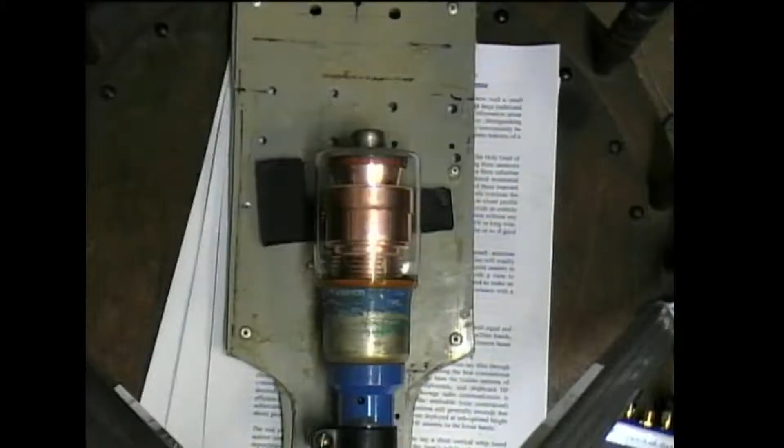So without further ado, if we do this transition, what you're looking at here is the vacuum variable capacitor that I showed in our last DATV night. Now that particular capacitor is a 5 to 200 puff range.

I purchased it at the Meet the Voice pre-loved car boot sale, thanks to Bryan VK7KWB, who had it already mounted on a board and driven, complete with a little geared drive and some micro switches as limit switches. So he's done an awful lot of work, and you can see the board that he mounted his particular loop on. So this is what I've been waiting for.

The impetus for this, that's probably a good place to start. The impetus for this was very much looking for a directional antenna with some gain for 30 meters, so for 10 megahertz. For those who don't know, I run 2 WSPR stations in the shack 24/7, one of which is on 30 meters, and the Smith chart exercise that we went through a couple of DATV nights ago was to tune up a piece of end-fed wire that I had up in the air for 30 meters, to improve the reception and transmission characteristics of that antenna. Now that's great, but it's a fixed piece of wire in a fixed direction.

So anyway, without further ado, what I will do here is I just want to show you, and I'll leave the link to this in the notes for this particular video. This is Miguel's VK3 CPU's mag loop antenna calculator, and this is web-based. It's all Java, a really nice little application of Java.

And what it gives you is a whole lot of variables down here, which include things like the diameter of the loop material, the diameter of the actual loop, the number of turns of the loop. So if it's a single loop or it's multiples of that loop, there's a transmitter power, and then the actual effective resistance of the loop.

And it gives you these sliders down the bottom, and there's a couple of other things down here you can set up: is it metric or is it imperial? What's the material it's made of? Is it copper or is it aluminium? Is it circular in shape? Is it octagonal? Is it hexagonal? Is it square? And that's fascinating to play with, and we'll do that in a little while.

And then along the side axes are all of the characteristics that get measured by all these different coloured lines in the middle here. There's the capacitance, there's the voltage that's generated, which can be a bit scary, the bandwidth in kilohertz, the efficiency in percentage, and then over here we've got the various resistances and reactances, the Q of it, how many amps are flowing through it for the power that you put in, and then also the wavelength of the loop, which is of course well under 1 in most cases.

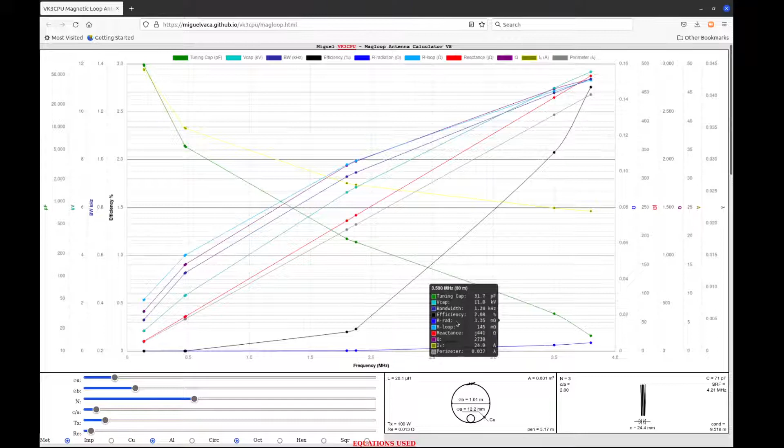Voltage across the capacitors, 6.8 kilovolts. And there's your tuning capacitor - that's one thing I didn't point out - it also tells you what your tuning capacitance should be, and we're at about 318 picofarads, so it's a reasonably large capacitor. I wouldn't be able to do it with the one I had here. So it lets you, before you even cut some heliax or cut anything, model what you're looking at.

At this stage, I'm looking at about a 2 meter diameter, or 1.9 meter diameter, using the 1/2 inch heliax. It gives me a range - about 70 odd percent efficiency at 30 meters at 10 megs. It also gives me 14 megs, so 20 meters. It does give me 40 meters, although the efficiency is fairly low down there, and it's only about 5 kilohertz. That's probably where it stops.

It does give me the other bands here, obviously 80 meters and a few others, but at 80 meters the tuning capacitance it's telling me needs to be about 250 picofarads, and I only go to 200. So yeah, it will probably cover 40, 30, and 20, but it's really the 30 meter band I'm actually interested in.

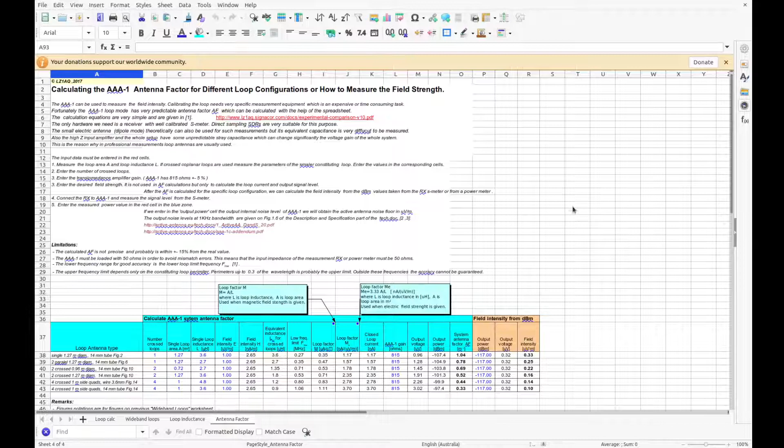Now this wonderful spreadsheet, a series of workbooks, enables you to do very similar to what Miguel VK3CPU can do with his simulator, in a whole bunch of spreadsheets. So you can put in a range, and it gives you all of the factors which are then plotted.

On the Java application, this gives it to you in a whole series - the loop calculation. So for receiving magnetic loop, you can put in a couple of your factors here, and it works out the rest of it for you.

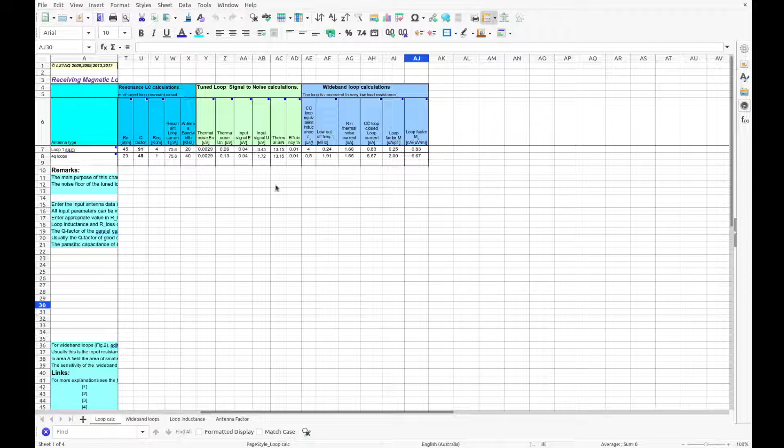This is for receiving loops, for wideband loops, and this gives you a whole bucket load of different configurations that this model calculates, and you can take into account. So you can play with different shapes, and it gives you the characteristics. And also, it's interesting.

This is LZ1AQ, who's come up with this, and I'll also post the link to this in the video description. He came up with this back in 2008, actually, by the look of that.

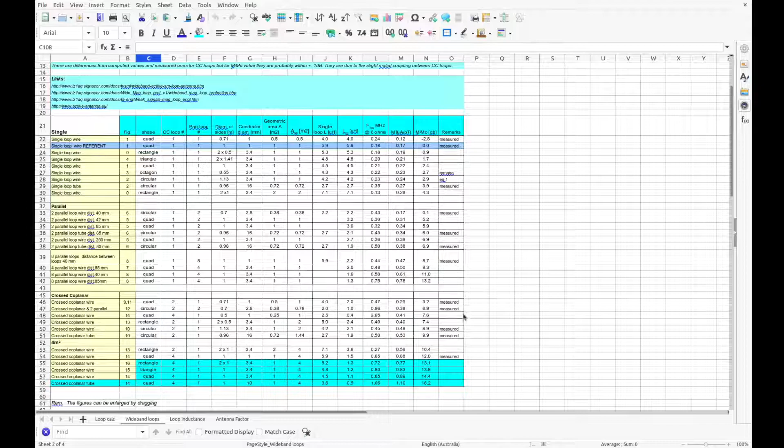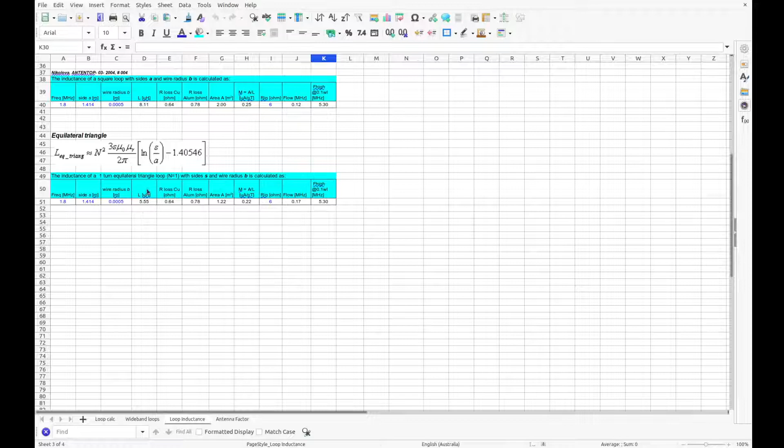In this particular paper, he's actually measured empirically some of these different loop configurations. So there has been some real world testing of differences in loop configurations as well, covering loop inductance, which is the formula behind the spreadsheet calculations, and antenna factor for different loop configurations, or how to measure the field strength.

I'll also post Steve Adler's, VK5SFA's, website. In his development of the 160 meter loops, which is an award-winning loop, I think he got an ARRL award for that in one of their homebrew sections. Congratulations to Steve. I'll post his website address, because they did a lot of testing, I think it was Adelaide Hills, or maybe AREG, or maybe both, with quite an amount of field strength testing on the actual loop configurations, and I think there were some adjustments made to improve the field strength.

They were hoisting field strength meters up into trees and all sorts of stuff. That particular design has actually been measured and proved to be quite successful. I know when I've contacted Steve on 160 meters during the RD contest and a few other contests, he is a thumping signal into VK7. So the loop works really well, and he was certainly hearing stations that I had absolutely no chance of hearing.

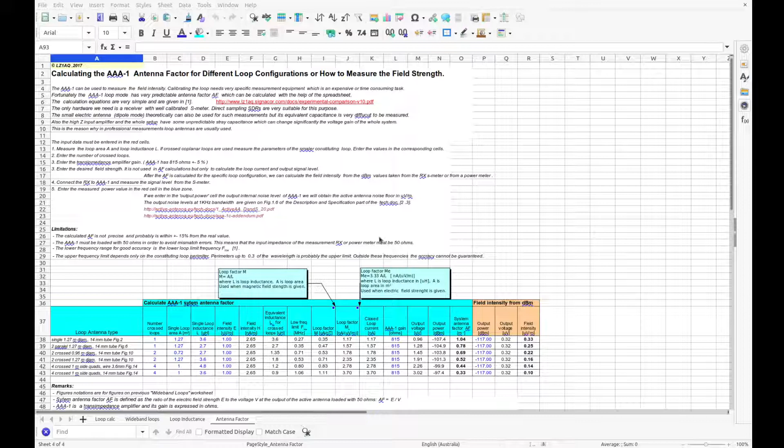So I'll post that. That's another calculator, if you like.

Now, let us know when you're running. Oh, yes, okay.

Oh, very good. Okay, and Jennifer Folds has just posted that the ACMA awarded my foundation license today, so fantastic. Jennifer, if you can let us know what your call sign is, that would be absolutely fantastic.

Warren just makes a comment there: haven't got my ham shack set up yet, so good stuff. We wait with bated breath, Warren. And for those who haven't got a VK0 contact, I'm sure you'll post when you're going to be transmitting, and you'll have an absolute pile up.

So what I was going to do now, this is a bit of an experiment. Let me just reposition. VK6JEN for Jennifer. So fantastic. Good stuff, Jen. I love the call sign, very easy to remember. Good stuff. Now, we'll just head over to our close-up camera.

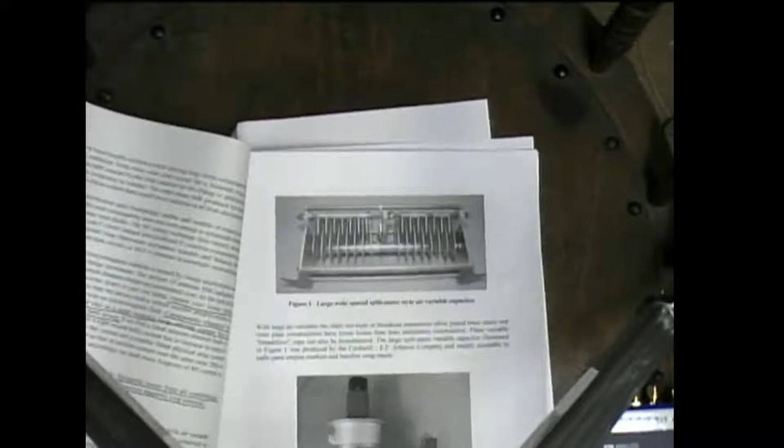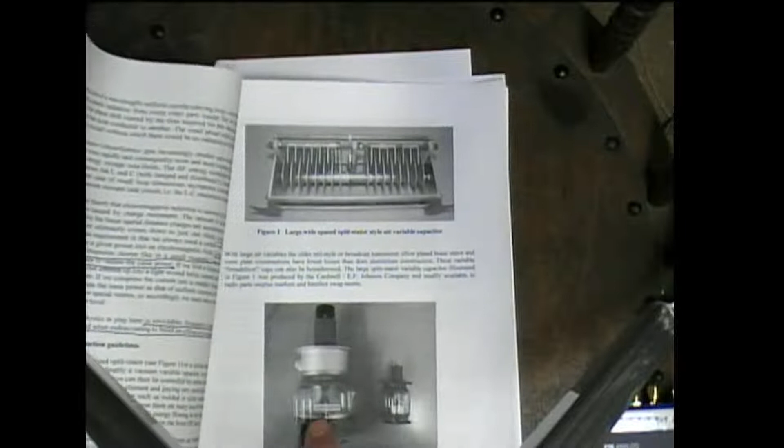There's a few other notes I noted in here, and he goes into the different types of capacitors: the butterfly type split stator air capacitors, then vacuum variable capacitors, and a few others. Then he goes into feeds.

Now, this is something I was very interested in. There are two types of feeds: the gamma match, which the microwave experimenters amongst us will know what I'm talking about - a little tuned stub - and then there is the Faraday loop. Interesting, the Faraday loop has a diameter ratio of 5:1, so 1/5 of the size of the loop. This is a loop totally isolated from the main loop. It sits usually down the bottom, away from the high voltage end where the capacitor is, and it's fed a variety of ways, but it's called a Faraday loop, usually 1/5 of the size of the loop you're looking at.

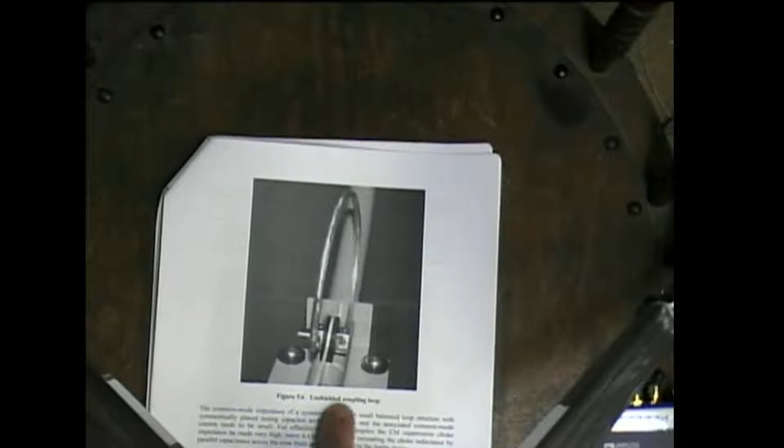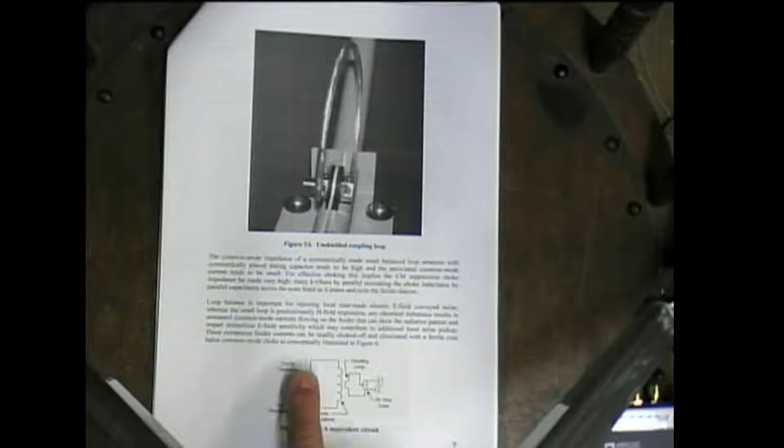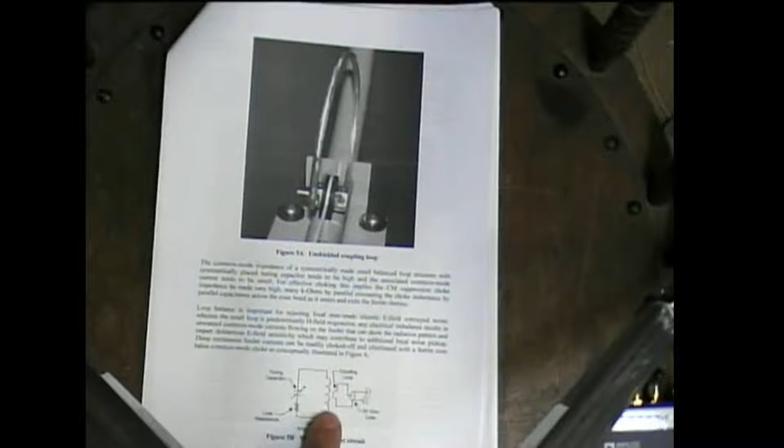Here's a particular unshielded coupling loop - it is literally just a loop. There is some shielding variants too. Here's the schematic equivalent of a magnetic loop: the coupling loop, the loop inductance represented from a schematic point of view, there is the tuning capacitor, and there is the loss resistance of that particular loop, taking into account all of the construction method, etc.

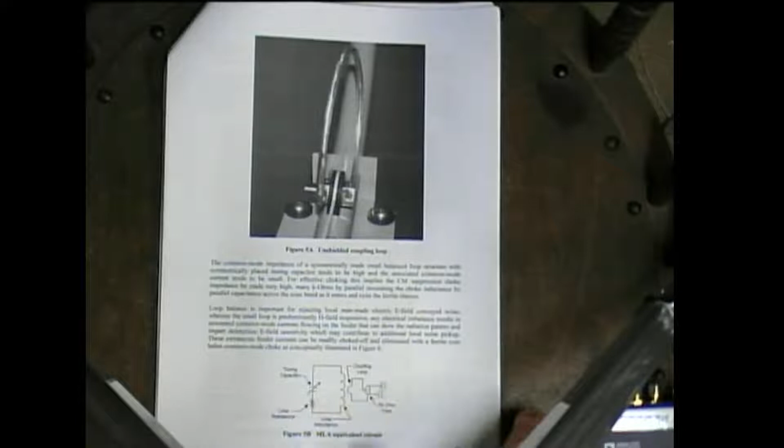And so that's the equivalent circuit, and then it heads off down a 50 ohm coax.

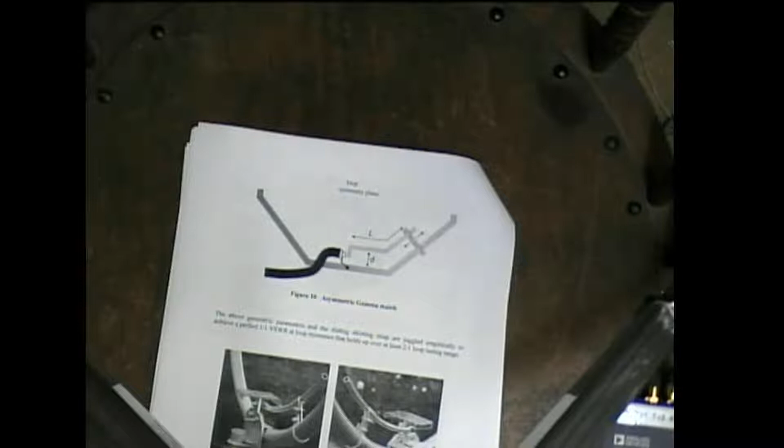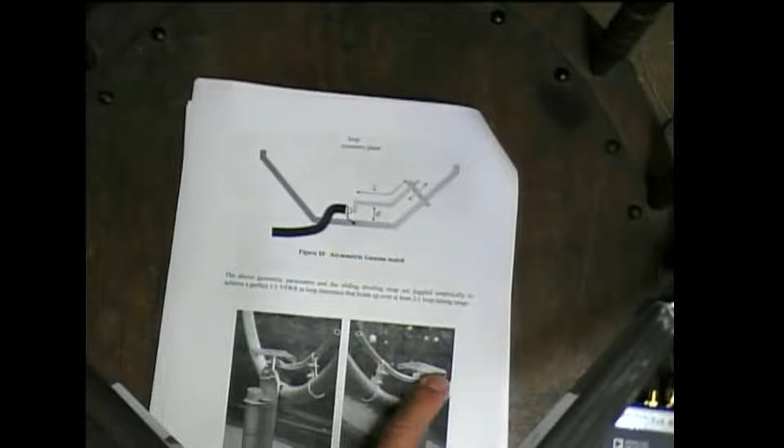Leigh talks about the other type of match, the gamma match. This is a small length of quarter wave, usually with a tuning short, a shorting bar that you can move to tune it so that it's matched to the coax. Here's a couple of examples on some very nicely made loops. There's the shorting bar that goes around the main loop, and that enables you to undo those screws and move it up and down so that you actually match the loop.

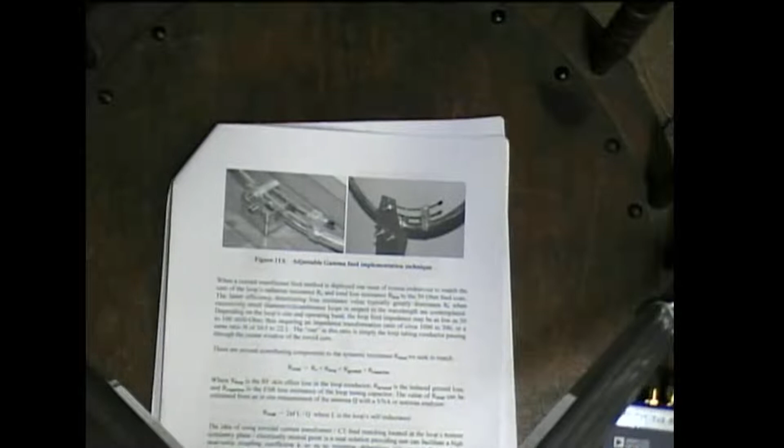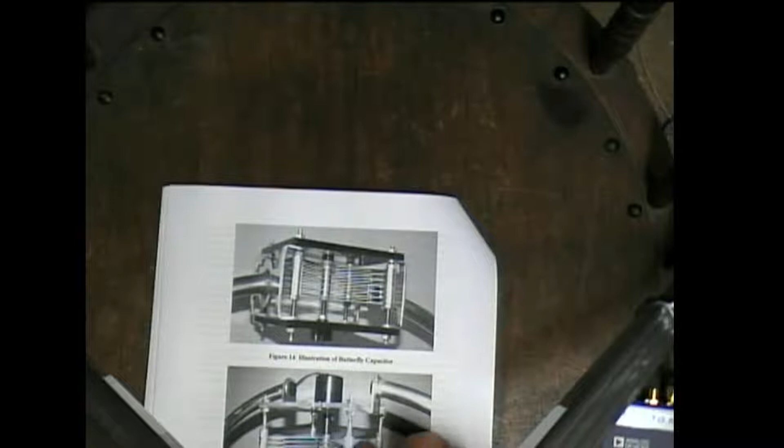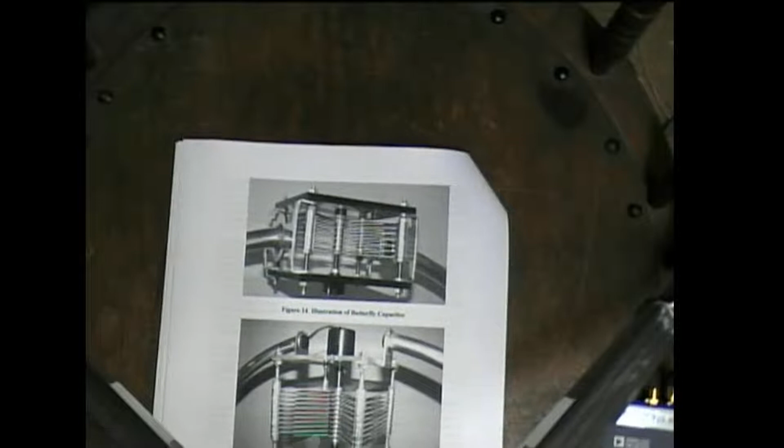He talks about the effective resistance, that RE. He shows here there's a butterfly capacitor, and to get that resistance right down and the Q up, he's even gone to the extent of, with an aluminium welder, actually welding all of those plates together, the stator plates and the rotor plates, to make sure everything has lower ESR losses and higher Q. These are all aluminium welded on each side of the plates of the capacitor, getting that right down.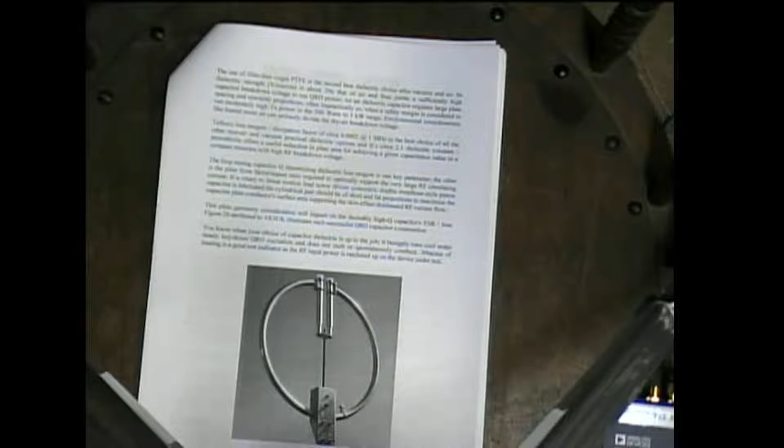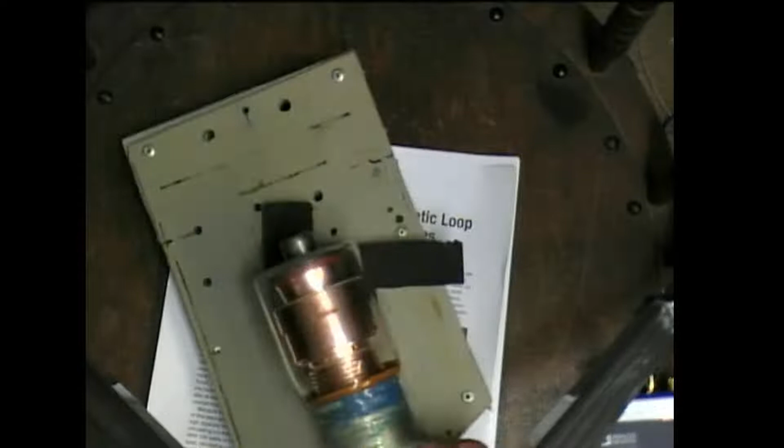So lots of different ideas, but the key thing is get that effective resistance down as low as you can, the Q as high as you can. Watch this space, I'll let you know how I go. I've got the key elements of it, as you can see. I'll build this up using the half-inch heliax at this stage, unless someone's got an aluminium tube bender of reasonable diameter that I can actually use.

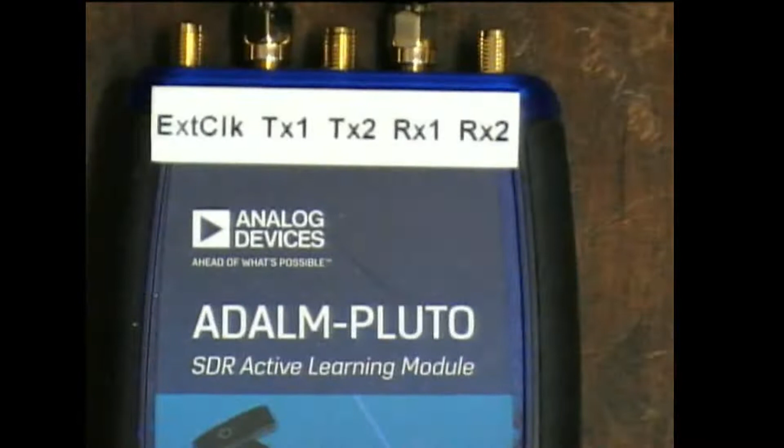So anyway, next thing I've been talking about and banging on about, the Pluto. The Pluto is an analog devices... this focus is really quick. This is a microwave SDR, and it's been opened up so that it covers 70 megs through to 6 gigs.

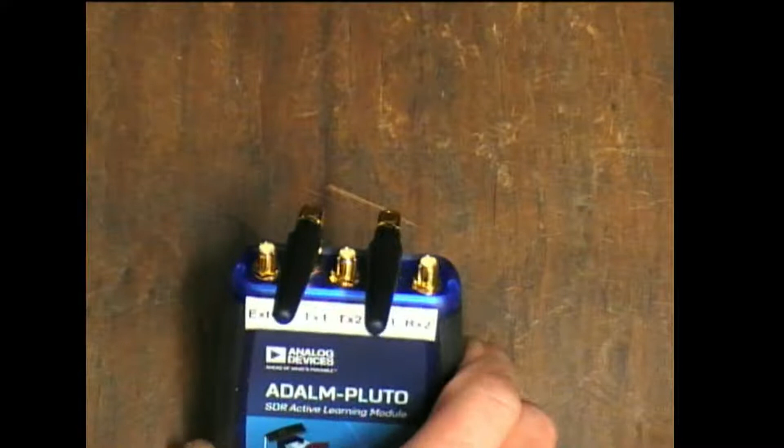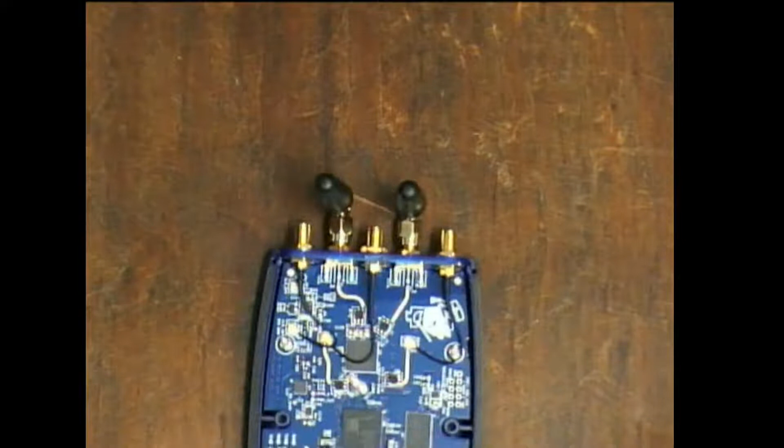One of the things I researched was that originally it only had TX1 and RX1 SMA connectors. Now you'll notice there are 3 other connectors that have appeared on the end of this. If I open this up, the one I actually purchased was the latest version, the Revision C board.

What the Revision C board gives you, if I zoom in here and move it up, you'll notice there are some UFL connectors. I bought some little tags with the UFL on one end - and can I just say, UFL connectors are not my favourite connectors, they're too friggin' small compared to SMA.

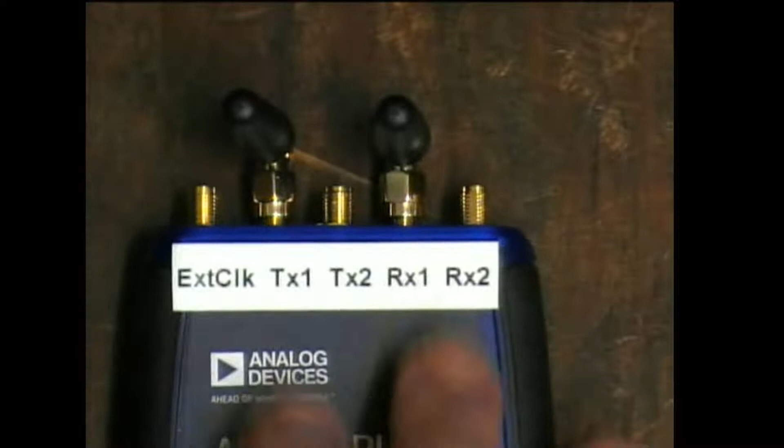What I've brought out here is the one I'm very interested in, the external clock signal, a UFL connector which comes out here. There are actually 3 other connectors: an external clock in, an external clock out, and a clock out which I don't see a need for, but there's also RX2 and TX2 connectors on here, so I brought them out as well. When we put the top on, you'll notice we now have an external clock, TX1, TX2, RX1 and RX2 - so there's 2 receivers and transmitters in that particular box.

So watch this space - this is for the Langstone project that I showed a couple of DATV nights ago. This is a microwave SDR transceiver, so that's what this is about.

I just thought I came across something now for something completely different, which is what I put in the opening slide. You've probably seen one of these, but I found this in a box. I actually gave this to my old man, who was VK5 Tango Whiskey, a long while ago - it's called the useless box, and it came as a little kit. The useless box is pretty useless because if you switch it on, it switches itself off.

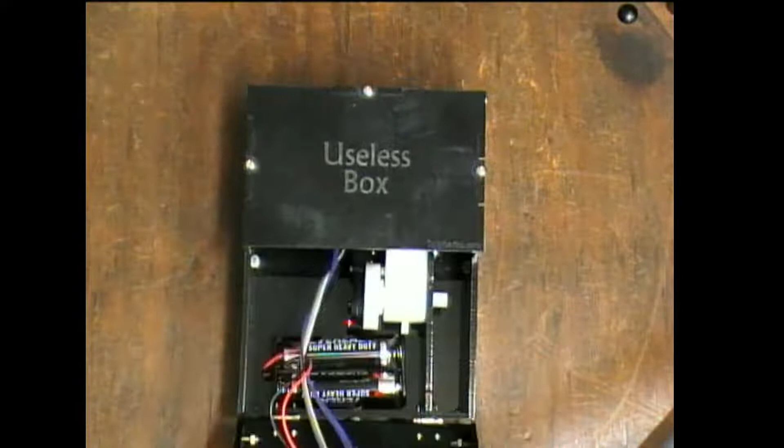And it's got a little battery in it, a little driven motor with a gearbox, a little arm with a micro switch on it, and it's wired in such a way that when you switch it on, it switches itself off. I've seen there's a wonderful couple of videos on YouTube around these boxes where there's 8 of them, and the guy flicks all of these switches, and it proceeds to switch them all off and go back again.

There's even ones where there's a skeleton hand comes out and switches it off, and all sorts of things. So anyway, something a little bit different - the useless box.